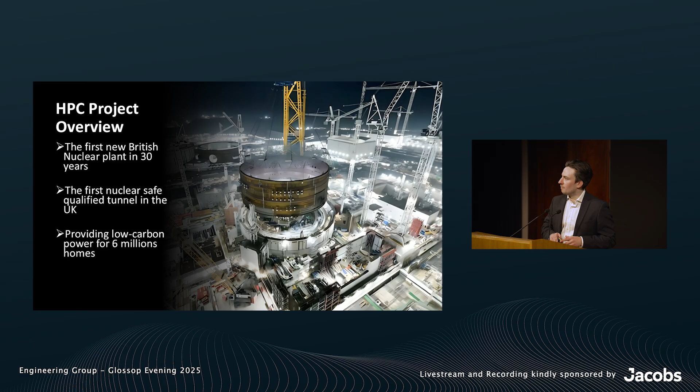The importance of the nuclear industry is growing, with 25% of projected electrical demands in 2050 fulfilled by nuclear. So the importance of geological insight for nuclear-rated structures, amongst many things, I've focused on planning and construction. When planning and locating nuclear sites, we must consider seismic resilience to near and distal ground movements, the effect of liquefaction, climate change adaptation with changing sea levels and coastal erosion processes, and ongoing geological processes such as slope stability issues on land and in marine environments, as well as dissolution in some places.

During construction, we have to look at unexpected ground conditions and mitigating those, working in a corrosive environment at the coast, and the normal tunnelling and underground structural hazards as well.

During my involvement at Hinkley Point C, I was involved in the marine works. The purpose of the marine works was to transport seawater from the Bristol Channel through to the nuclear power station, where it was circulated around the reactors to cool them down. The water is then treated and put back out to the Bristol Channel.

This is done by 3 tunnels: 2 intake tunnels, 3.5 kilometres long and 7 metres in diameter, and the outfall tunnel, 1.8 kilometres long and 7 metres in diameter. At the distal end of these tunnels, we had 6 shafts which connected to the seabed. The tunnels themselves were sunk by TBM, the shafts sunk from offshore vessels, and then we have where I was involved, which is the tunnel shaft connections.

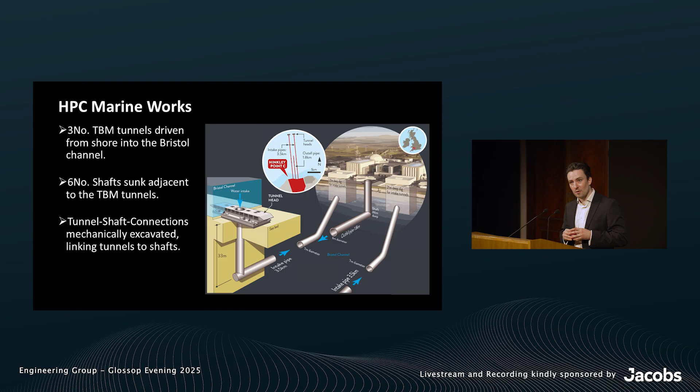Something I think is quite interesting about these tunnels is when they are in full bore and operational, they'll be able to transport 120,000 litres of water per second. And something I quite enjoyed was the fact that they were predominantly gravity driven, a nod to efficiency there, in order to reduce the amount of pumping and therefore the cost of producing a unit of electricity at the power plant.

I'm going to take a closer look at where I was involved, which was the tunnel shaft connection. On the left-hand side of this diagram, you'll see the shaft, which connects to the seabed, about 33 meters above us. On the right-hand side, you'll see the TBM tunnel, which connects back to the power station. These two structures are offline from each other to isolate the stresses they put into the rock during excavation, but this requires a connection between the two.

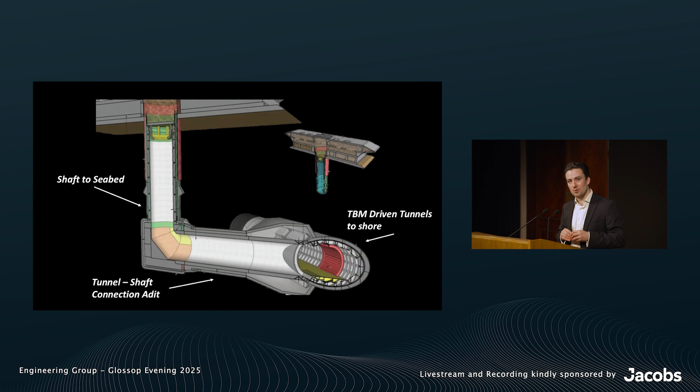In my case, I was involved in the temporary works, where we were opening up an underground space driven from the TBM tunnel over to the shaft. This opened up a space to allow the permanent solution, a reinforced concrete structure, to be assembled within that.

Fast forward to the Triassic, and we have a period of extension, with openings of half grabens and deposition of sediments - in this case the Mercia Mudstone, the Arden Sandstone, Blue Anchor Formation, and the Penarth Group. Continuing into the Jurassic period, we have continued rifting and deposition of the Blue Lias Group, which is what we ended up tunnelling at Hinkley Point C, then the Oxford Clay and Kimmeridge Clay above that.

During the Cretaceous, we have a reversal of the tectonic setting, going back into compression, so we have reactivation of the existing structures in compression. Following that, we have deposition of the Quaternary deposits - what they've done for us, I'm not sure yet.

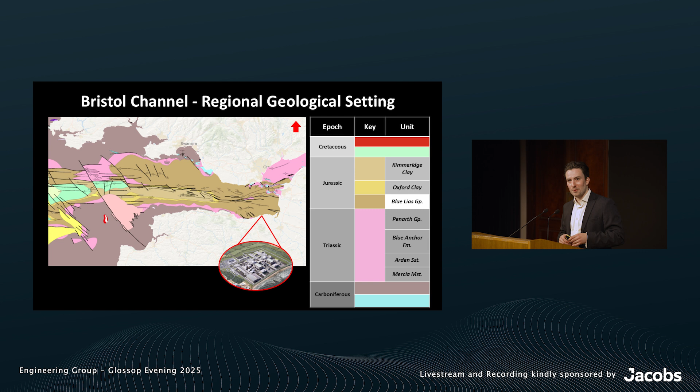Moving forward, I'll look a little closer at the Jurassic sediments, the Blue Lias Formation. On the left-hand side here is a view that will be familiar to some people - it's at Limpert Bay in Wales. On the right, a less popular view, under the Bristol Channel. The Blue Lias Formation is...

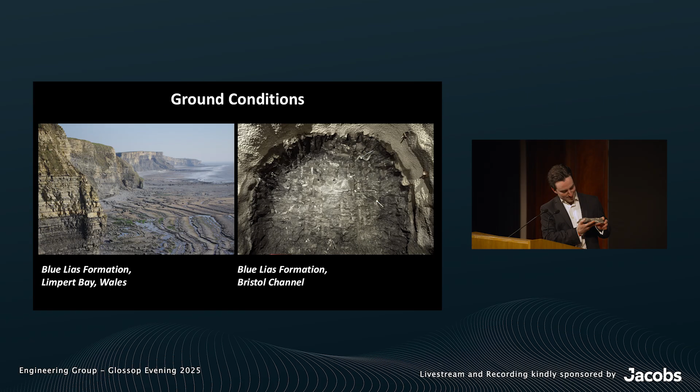...mudstone and limestone interbeds. The limestone beds are 30 to 300 mil thick in what we've seen, argillaceous and blue-grey in colour. The mudstones are much more thinly laminated, like this one I rescued - much more thinly laminated, dark, and in places fossil-rich. This one I took because it's full of ammonites, and much more fissile as well.

I'm going to talk a bit about some of the key hazards we came across while tunnelling in this formation. We have variable ground conditions, resulting in variations in strength over short distances, but also different rockfall or rock failure mechanisms. The limestones are much blockier and therefore more liable to kinematic failure types - this was mitigated by additional bolting in places. We then had the mudstones, which were much more prone to raveling failures and soft ground squeeze. This was mitigated by shotcrete and ongoing monitoring.

We then have groundwater and ground gas. Associated with the Blue Lias Formation, we have interbeds of organic rich material, which can produce H2S and methane. Combined with the Bristol Channel above us, this results in the potential for groundwater and ground gas inundation to the adits. We also have the potential, given the tectonic activity in this area, for quite a lot of fault zones, which result in unstable ground masses. Groundwater, ground gas, and fault zones were mitigated through the use of ground investigation and forward probing.

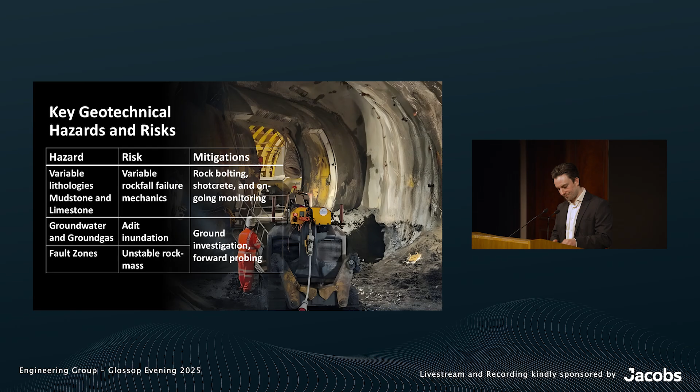I'm going to talk a bit more about my role now in the project and the key points of what a geologist would do within the remit. My primary function was to link observations of ground conditions from the tunnel back to the design team and into the daily review meetings.

Also supervising excavation of material and witnessing adit support installations, and then comparing the ground conditions against the design assumptions that were made - this was mainly in rock mass characterization.

To begin our process, we would start from the TBM tunnel, as you can see in the biggest picture on the right-hand side, and we would look to do forward probing from this tunnel. This represented the most local, finest scale of ground investigation. So the model started off with much more regional ground investigation, coming down through the TBM, and then into this stage where we're really probing the ground in which we're going to be excavating.

So you can see on the blue diagram, the bottom left one, the kind of porcupining probes. This gives us forewarning of any oncoming hazards that we might be expecting, looking back at ground gas, groundwater, and unexpected ground conditions.

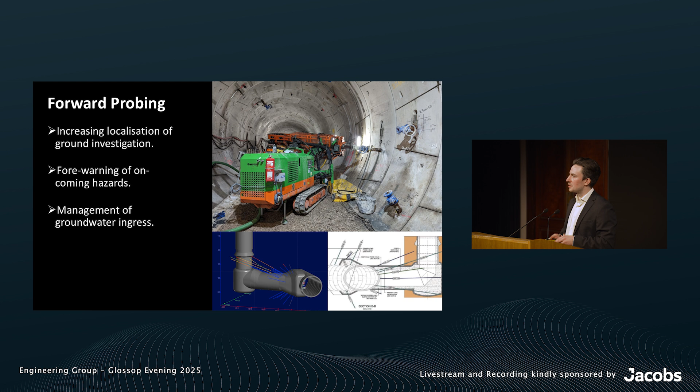So once we were a bit more familiar with what we were going through, we could do full excavation. In this phase of works, we had 6 adits altogether, and each one had 50 advances of excavation, removing around 800 metres cubed of rock per adit.

When we were doing an excavation, geologists would be on site looking at characterising the rock mass and giving it an RMR value. To produce the RMR value, we would estimate UCS by Schmidt hammers, look at RQD, and then the condition, spacing, and orientation of discontinuities.

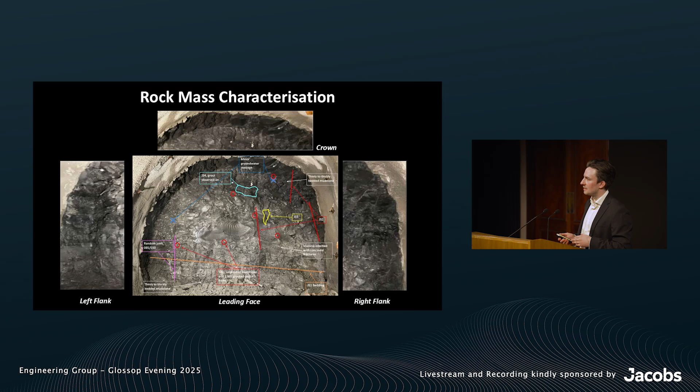So once we'd given our RMR and fed that back to the daily review meeting, there might be changes or enhancements to the support measures.

We would then look at selecting support, as we had different anchors available to us, and then management of groundwater and ground gas. Where there was an intersection of these things, we could compare it back to the ground model to understand its potential source and if we could expect more or less of it coming through, and look at how we could potentially mitigate these things.

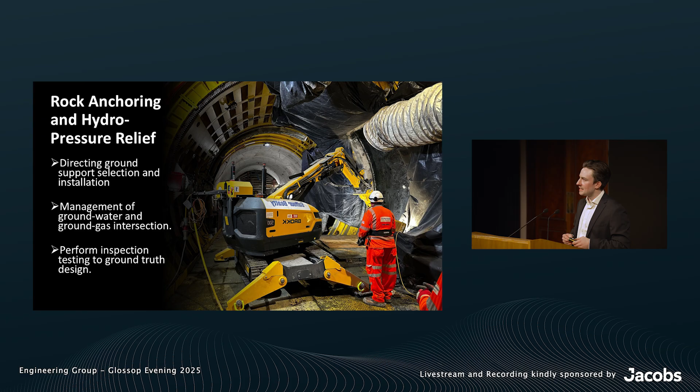We'd also perform inspection testing of our ground anchors to ground truth the design and ensure it was operational to the desired standards. So, in conclusion, I've given an overview of the importance of geological insight to nuclear development.

And the importance of understanding a full ground model of your site before we begin with this kind of engineering. I think the 4 key areas in which ground engineering and geological context is important are safety, economy, project agility, and resilience. Safety during construction, in which we have to keep our workforce safe, but also in operation.

These tunnels are vital to cooling the nuclear reactors and therefore imperative to the design of the structures. We have economy - as I was working in temporary works, we could optimize our use of shotcrete and anchors to the ground conditions, which then had a time and budget enhancement.

We then have project agility, so being able to understand which kinds of hazards may be present, we could adapt toolbox measures to combat this and avoid redesigns and being surprised by these things. And then in resilience, finally we produced structures suitable for the ground conditions in which they exist, and hopefully will operate for the entire lifetime of the project going forward.

So thank you very much for listening. I hope you all have a great evening.

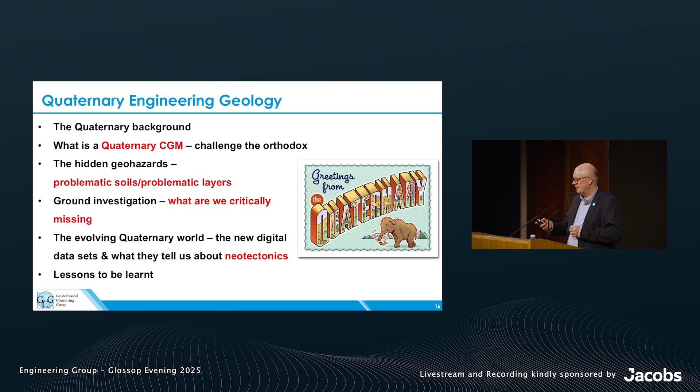So I've changed the title now from what has the Quaternary ever done for us to what has the Quaternary done to us. And hopefully we can go through and see some of the case studies where we've had these problematic ground conditions. I had a lovely conversation with Rodney Bridle about the days of dam engineering, and the dam engineers had this term called treacherous ground, and I felt that was actually more appropriate.

You may just guess that I did this slide on Halloween, so hence the menace that is the Quaternary, something that we need to approach our ground investigations, approach our conceptual models, really understanding that these ground conditions are highly variable and can kick an engineering project, a construction project, in the teeth if you don't understand that variability.

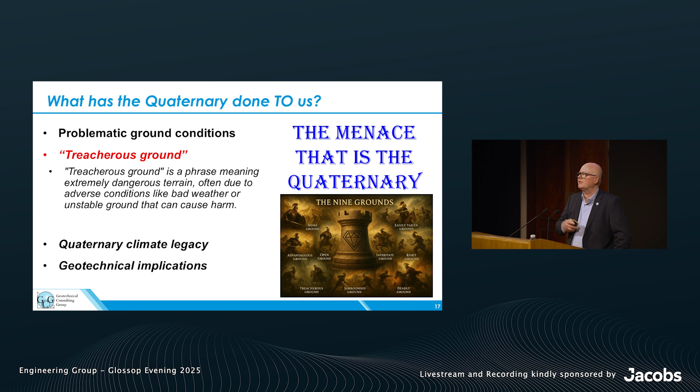So we're going to have a little look at the Quaternary climatic legacy and particularly understand those geotechnical, those ground engineering implications that those climatic changes, those significant climatic changes, have actually presented.

This is why we get a bit sneered at by the hardcore geologists. So we've got 4.6 billion years of Earth history. The Quaternary is the last 2.6 million years. But really, in terms of our engineering significance, it's the last 24,000 years that have really churned up that ground, given us deposits, given us geological hazards. So in terms of that whole spectrum of the stratigraphy, we're the unwanted uncle at the party in terms of the geological column, right at the very top.

But what we all do in our day-to-day jobs, it really is that most significant part of that geological column. Which is ironic, because if you think back to your university courses, your masters, your undergraduate courses, it's perhaps the element of that stratigraphic column least focused upon. Yet when we actually go out and start to work, we see that it's probably the most important thing we need to understand if we're going to de-risk projects and have successful engineering constructions.

I was told by the master's students at Portsmouth that I was the riddler. So there's your first riddle: where's the Quaternary legacy? If you look at the stratigraphic distribution of rocks across the British Isles, where are those Quaternary deposits, those Quaternary land systems? Of course it's a trick question, because every single part of the country, top to bottom, John O'Groats to Land's End, has had a Quaternary influence.

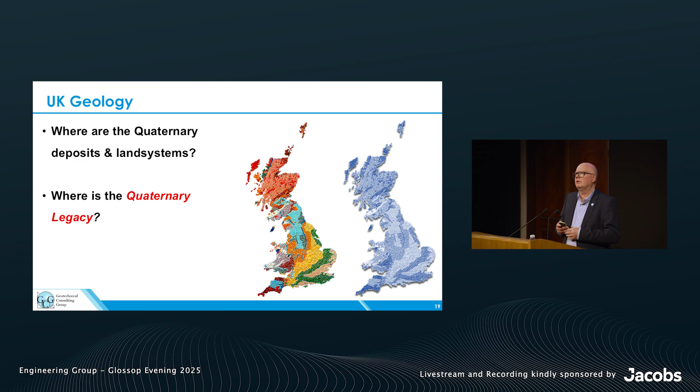The climatic changes have left a legacy within that ground profile. So wherever we're engineering, whether it's in Shetland or Penzance, we're going to have some legacy of those major climatic changes that have influenced those ground conditions, that have given us that treacherous ground, those problematic horizons. We can't escape the Quaternary as a geological interval, as a series of legacies left behind.

So really what I want to set out to achieve tonight is to change your ground model mindset. We've spent a lot of time over the last 20 years getting conceptual ground models to be the bread and butter of engineering geology, understanding that if we can appreciate what is in a particular geological environment, we can go and investigate it, we can de-risk it.

But we've got to slightly change our mindset when we're looking at the Quaternary, because we've got different aspects that have influenced those particular ground conditions. We've got geotechnical implications as well as geological implications. So we really need to understand some of those scientific fundamentals, because there's a legacy we need to appreciate when developing those ground models.

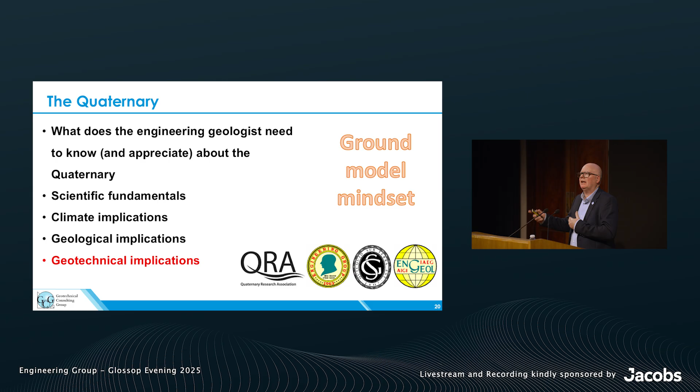I'll show you what I mean, how we can move from conventional ground models and give you some takeaways that you can use to appreciate that variability and that legacy within those particular horizons. So the other thing we need to start dispelling is some of the orthodoxies.

This is perhaps the layperson's idea of the Ice Age. We've tended to talk about the Quaternary as, in singular, the Ice Age. And there's this static picture here, nice diagrams of northern hemisphere, southern hemisphere ice sheets developing, valley glaciers developing, permafrost tundra in front of those ice advances. We seem to think of this as a static picture, nothing really to see.

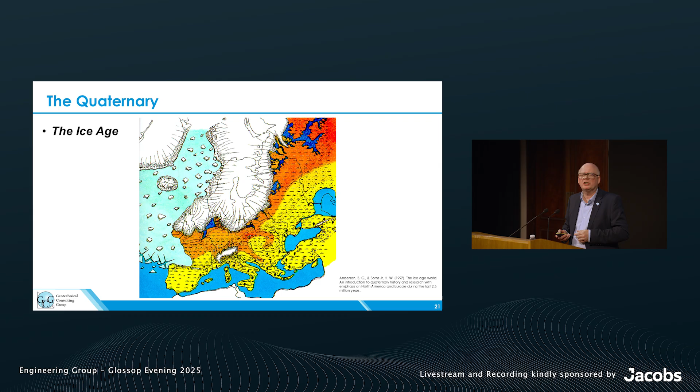But when we actually start to delve into those climatic changes, we've got a whole variety of different conditions we need to appreciate. We have glacial conditions, when it gets cold and we see ice sheets advance. We then have non-glacial conditions when those ice sheets retreat. Within those cold conditions, we have stadials when it gets a lot colder, and interstadials when it gets a lot warmer.

So we're starting to see fluctuations in climate, fluctuations in temperature, which means that static picture is completely wrong. We're seeing advances and retreats, advances and retreats. As we advance, we get isostatic depression, sea level rise, sea level fall, then retreats, then recovery. We've got this complete cycle of cold, warm, and very warm, all influencing the ground profile, all having a legacy in those geotechnical conditions.

And what's the enemy of geotechnics? The enemy of geotechnics is water. And this is a system that's got an awful lot of water. What happens when water freezes? It expands.

We get all sorts of modification of that ground profile. So we've got these temperature variations that we then need to understand in terms of that legacy, in terms of that particular ground profile.

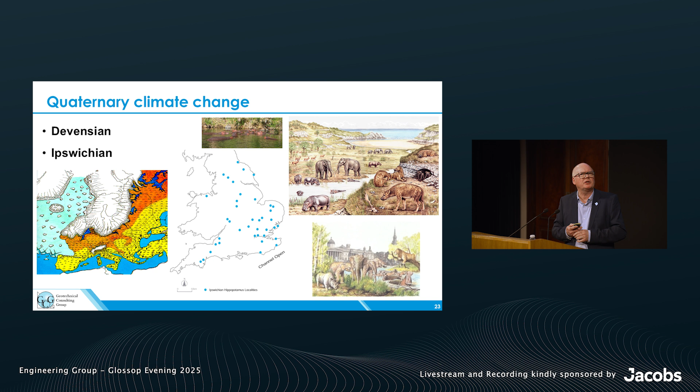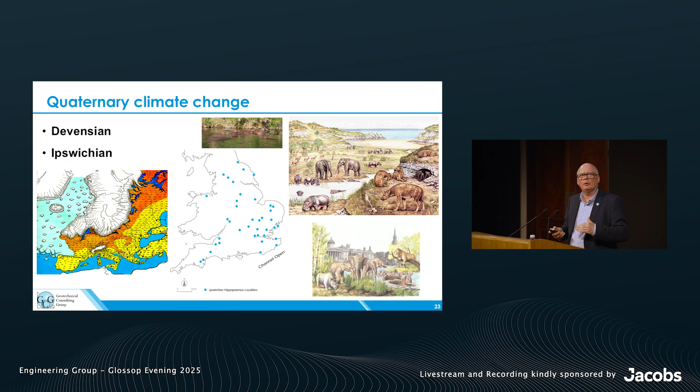We don't think of the Quaternary as having warm conditions, but there's some research that suggests that on the Scilly Isles, there were subtropical conditions. So we think of that in terms of a weathering profile, in terms of that ground modification from one extreme to the other. We've got some significant influences to appreciate, again getting to that mindset about that top surface legacy.

I think this was the most fantastic exam question you could set, and we've never sort of pushed its importance, but this is the geotechnical implications of Earth's interstellar position. So what's driving this is these Milankovitch cycles.

That's a Serbian mathematician called Milankovitch on the bottom left there, and that was James Croll, who was the janitor in Edinburgh University, who also added into these models to understand where Earth's position was in relation to orbiting the sun. We have an eccentricity, we have an obliquity, we have a precession. So we're at different positions in terms of that orbit that's giving us these climatic changes.

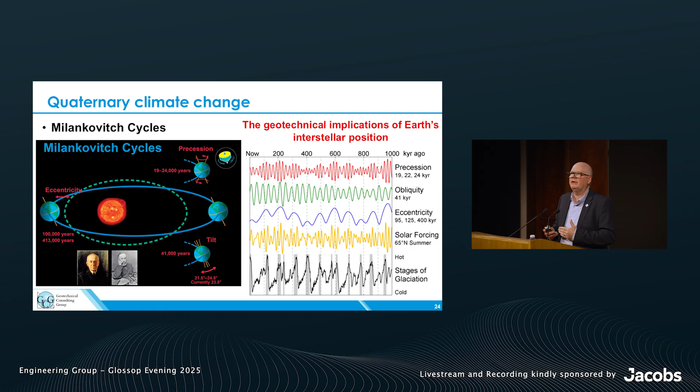When we start to actually plot those climatic changes, we can start to see we've got these great swings across a very, very short period of geological time that, again, are constantly modifying that particular ground profile.

Even if we go into more historical times, we can again see some of those fluctuations. We had what was termed the medieval warm period. Between 950 AD to about 1250, we had significantly warmer temperatures in the country. We were a wine exporter to France during that period.

So again, what does that mean in terms of the ground profile? We're starting to see desiccation. We're starting to see moisture conditions change.

And then that was followed by a very, very wet and very, very cold period where we had the Little Ice Age. We got the frost fairs on the Thames. Many of our landslides we can actually date to being triggered in that particular period.

So we've got these macro climatic changes and smaller cyclic changes again, all having an influence, all actually affecting that particular ground profile. So we need to start thinking about moving away from this orthodox picture. This is perhaps why some of the diagrams we see are perhaps not really helpful in terms of understanding that legacy. This is the static picture.

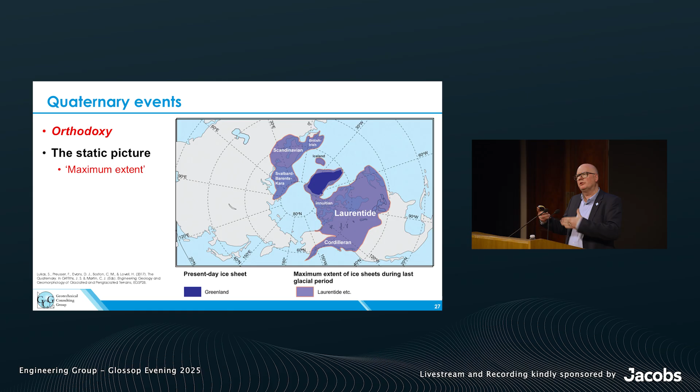This is effectively the maximum extent of those northern hemisphere ice sheets. We've got lines on a map - solid lines, not dashed lines that we've been putting on a map. What we need to start to think about is are these lines really helpful? Have we got these finite lines? Is this really helpful in the development of understanding usable conceptual models?

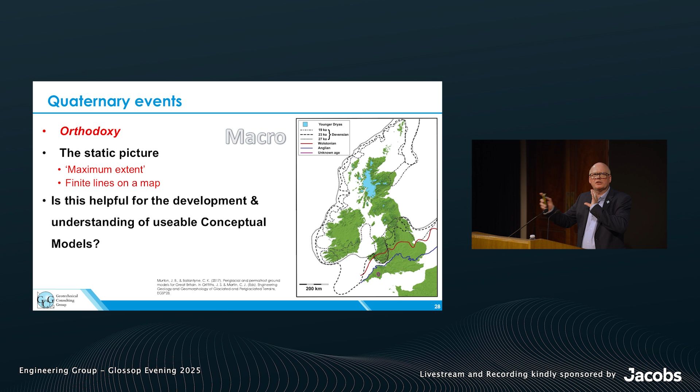We tend to look at lithological boundaries and think that particular strata finishes there, that particular strata starts there. The diagrams that you can see there are just simply indications of a potential maximum extent. They are not definitive in terms of where the modification of that ground profile has actually taken place. But they're a good starting point to start to understand about the climatic influences that we see across the country.

And it's a very, very useful map in the middle there where we can start to understand where we've had glacial conditions, where we've had periglacial permafrost conditions, and where we've had a mixture of both. We can start to build up that understanding of those climatic influences and start to appreciate that we haven't got, if you like, solid lines, fixed lines. We've got fuzzy zones that we need to start to appreciate.

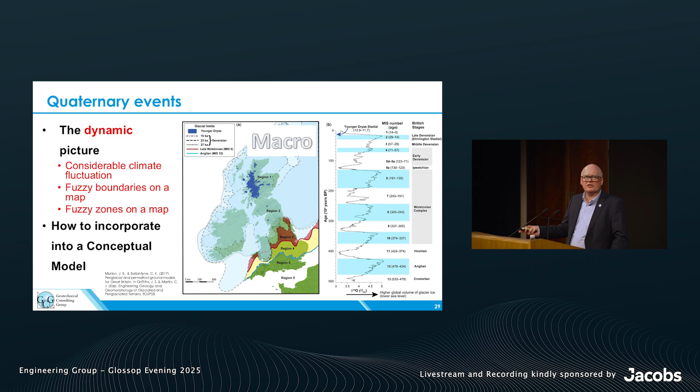We've got this much more dynamic picture of ice advancing, ice retreating, ice advancing, and ice retreating. So the question is, how do we incorporate that variability into a conceptual ground model to fully predict the kinds of ground conditions that we could come across in an investigation or within a construction project?

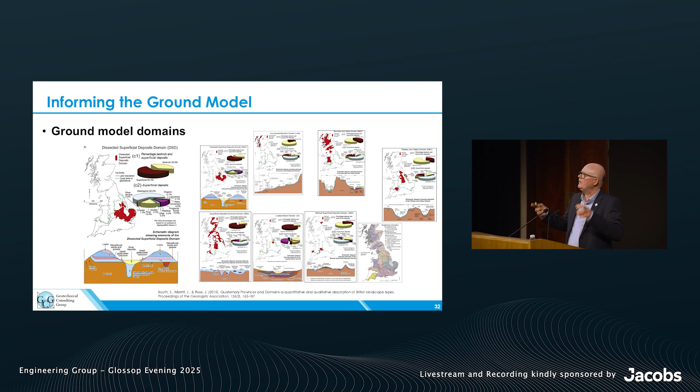One very useful key go-to paper is by Booth, Merritt, and Jim Rose, when we started to look at the concept of provinces, domains, and land systems. This looks at the glacial and periglacial influences, upland or lowland, across the country, and is an extremely good starting point for developing that conceptual model of ground conditions, landforms, and deposits. What is the expectation in that particular environment given those climatic variations?

But I want to give another kind of twist on that. I once went to a very interesting public lecture given by Professor Sir Roger Penrose, who worked with Stephen Hawking at Cambridge and Dennis Sciama. He gave a presentation on the origin of the universe using 3 overhead transparencies, the first simply saying, I was Sir Roger Penrose. So, hopefully not in the same caliber, I'm going to give you 3 slides to get you into that mindset.

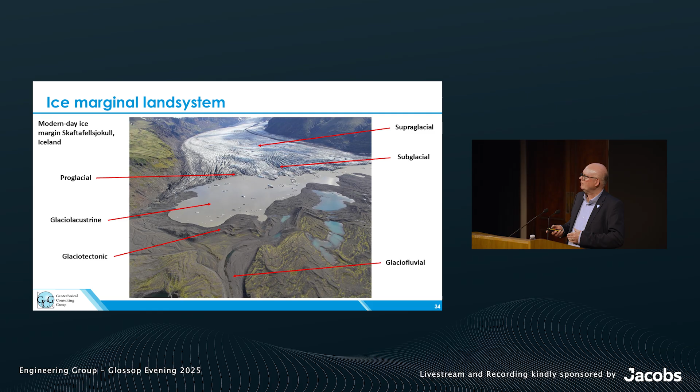These ice marginal systems become really quite significant. When we first started engaging with the engineering group and the QRA, the Quaternary Research Association, working on Engineering Geology Special Publication number 28, we were a bit dismissive about the marine isotope curves, seeing them as just a research element showing climate had changed with the Milankovitch cycles. What has that got to do with geotechnics?

But the more we focused on these curves, the more we realized this is what was influencing that ground profile. We needed to understand how the climate changed, the frequency of that change, and the legacy it provided. We had some very old glaciations, the first to incorporate bedrock into glaciogenic materials, but subsequent ice advances completely reworked and remolded that material, giving a different geotechnical characterization of ground conditions. Understanding we didn't have a static picture but a dynamic one, with variability, reworking, and constant lateral and vertical change, became very important in developing that mindset.

I hope this works. This was brilliant work done starting with the University of Aberystwyth, Sheffield University, and Durham University, part of what was called the BritIce project, looking at that variability and starting to reconstruct ice margins.

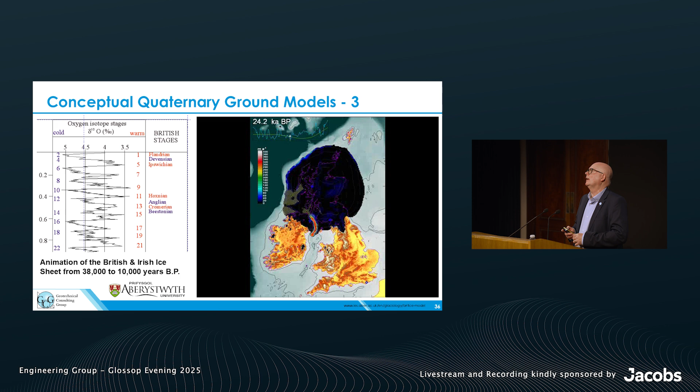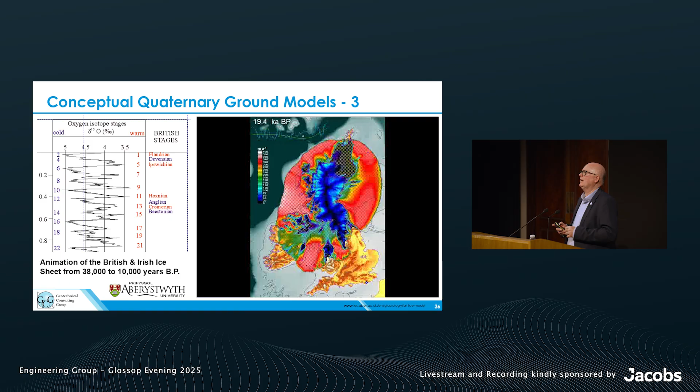The scale there is meters per year. And you start to see now, effectively, what is happening to your ground profile in this extremely short period of geological time - this constant reworking, this constant remolding, this constant incorporation of new material into old material, giving your geotechnical layer, your foundation layer, your investigation layer. We've not got this static picture, we've got a highly dynamic picture.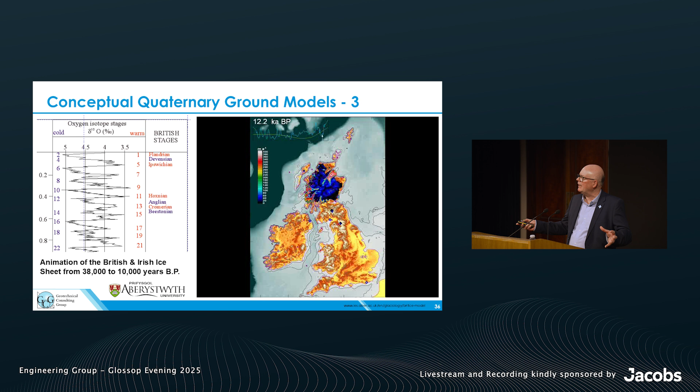Highly dynamic reworking of that particular terrain, and sometimes it's difficult to break away from, because we like static things. We're used to understanding the London clay formation as a nice static horizon, give or take. We understand the chalk, give or take. The Mercia mudstone, give or take, is relatively static. Here we've got massive inherent variability because of these dynamic processes in this very, very recent part of geological time.

So if we're going to inform the ground model, this quaternary history becomes really quite important - some of these fundamentals of quaternary science, understanding the climatic variations, what does that mean in terms of the glacial and periglacial genesis of the materials we're looking at? Have we got these primary tills where bedrock has for the first time been incorporated into an ice advance, or have we got reworking? The nature of that ice advancing over the substrate.

Have we got passive or active transport? Have we got material that's being ground down into a fine-grained mass? Have we got larger clasts that have been carried along on top of the ice, for example? Have we got direct bedrock inclusion? Have we got reworking or remolding actually taking place? So that whole ice process gives us our engineering and geohazard significance.

Those mechanical processes become significant in the understanding, in the mindset development when working in these terrains. We've perhaps not got deep basin sedimentation or a desert environment which is spatially very, very extensive and very continuous. Here we've got this continual variability, this continual lateral and vertical variation. And that's the legacy, really.

We're not going to read them all out, but this starts to become the geotechnical legacy. We've got anisotropy, we've got different environments, we've got water, we've got land, we've got shunting in terms of tectonism, we've got constant reworking, we've got constant lateral and vertical variability, and each of these then has a geotechnical implication that we need to appreciate.

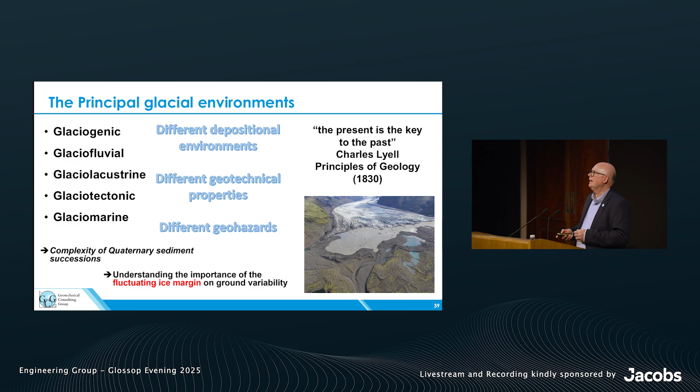So we're getting geotechnical materials. We've got security on standby for certain of you - if anyone says the word in the middle, which some of you know from many years is not allowed.

But we need to again move away from thinking of glacial tills as one material. All of these, you might say, could be described as a glaciogenic material, as a glacial till. But some are deposited subglacially, some are carried on top of the ice and deposited supraglacially, some are shunted along, some are tectonized. So that one word till, perhaps we need to subdivide further, because as you can imagine, looking at the images there, each has a different geotechnical response.

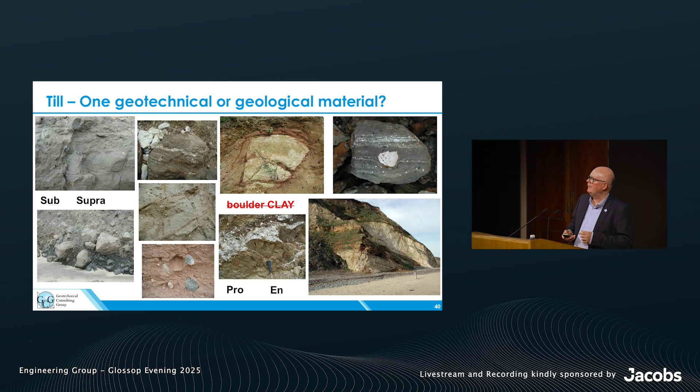In this system, the ice marginal system becomes really important. This is perhaps the most dynamic of those particular environments. We have lateral and vertical variability, material variability, and geotechnical variability. When you look at that slide, where would you plan an investigation? I think I've got another example there.

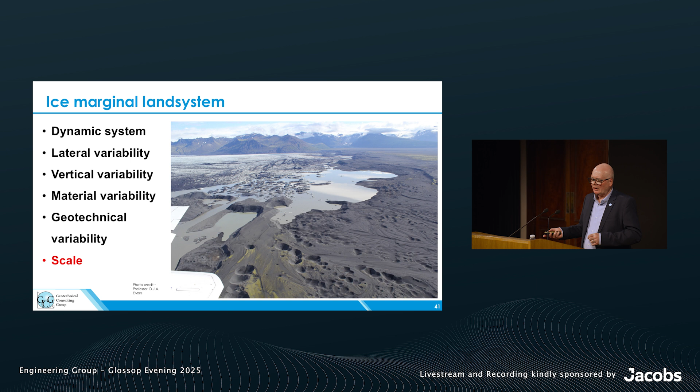We've now moved offshore, and that's the environment we're investigating for our wind farms. We seem to have forgotten that sea level recovery is only very, very recent in quaternary terms. But at the moment, we've got many investigations - seismic surveys, offshore CPT surveys - taking place in that environment. For example, we've got east-west rail effectively traversing across an ice front going from Oxford to Cambridge, and many monopiles. If you think about how you'd plan that investigation without getting into the mindset of a quaternary conceptual model, you could come really quite unstuck. Across that whole scenario we have differing geotechnical parameters, differing ground conditions on a very small scale - sometimes on a 10, 20 meter scale we're seeing that kind of variability.

So our mindset when interpreting the data needs to move away from where we are in conventional, if you like, solid or bedrock geology.

I was going to protect the innocent on a few of these, but I'll give you a few examples of what happens when you don't fully understand that variability in these environments.

This was a brand new school built in Hertfordshire, and very quickly they had groundwater flooding issues, because they built the school effectively on a buried glacial fluvial system. The ground investigation hadn't fully understood the legacy - the present is the key to the past - with a whole series of stacked and buried channels. The construction had taken place, the ground model hadn't been fully appreciated, and effectively there was complete hydrogeological continuity through these relic glacial fluvial channels.

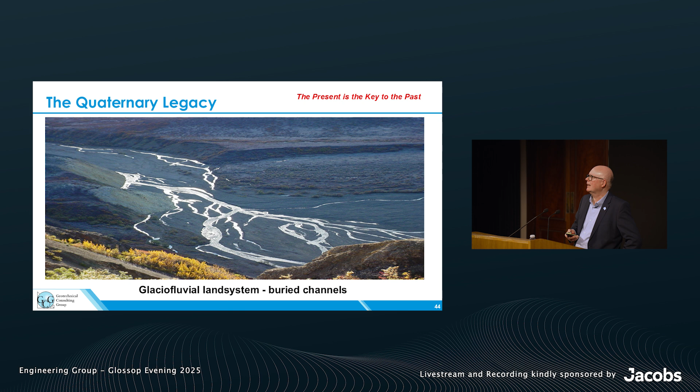Another example - this is Bishop's Stortford Station Yard. New construction taking place, starting to put in piles. This is the River Stort, a major drainage channel coming off the Anglian ice front. You can imagine what happens when an ice sheet wanes - the energy in the system, the downcutting, the sediment emanating from that system rapidly fills up a very deep valley. The land system present was a series of channels, abandoned channels, and abandoned ponds. So every time we did a CPT across that car park we got a completely different trace. Every time a borehole was put in place there was no lateral continuity, because you had this braided system, isolated ponds, small lakes, each with different sediments, each giving different ground responses in terms of the geotechnical profile.

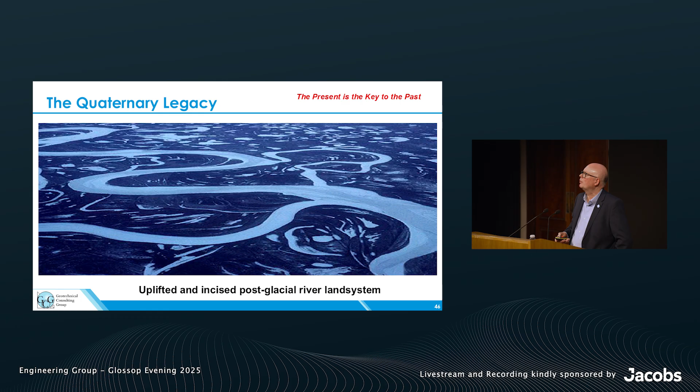Another example - this was a new retaining wall cut into the supposed London clay in North London, which started to get significant deflection. The environment was effectively the relic periglacial environment - flows and active layer detachment slides, giving a whole variety of remolded, sheared material. The construction was effectively on that paleo legacy environment without fully understanding it.

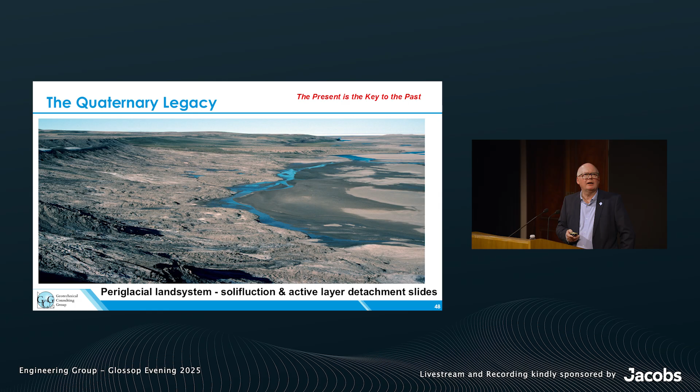And this is where testing the orthodoxy comes in. This was the area of the classic Skempton brown clay, the weathered profile within the London clay.

How do you test whether it's a weathered profile with reduced strength, or it's completely remolded as part of the solifluction flow and active layer detachment slide processes? This is where the smallest evidence, when logging and describing these materials, becomes very important. In the middle of that brown clay, there's a nice rounded clast present.

That is a clast from the Dollis Hill gravel, the terrace gravels that sit on top of the London clay in the London basin. So what you're looking at is completely reworked material that's incorporated a single clast that's managed to entrain itself within that material. That's important geotechnically because that is now fully remolded, with a residual strength, as opposed to part of the brown clay, the classic brown grey clay in the London clay formation, which is part of the weathering.

So extremely small pieces of information can sometimes help unlock that ground model. Those of you who are more geotechnical engineering focused know the significance of changing that value in terms of your design calculations.

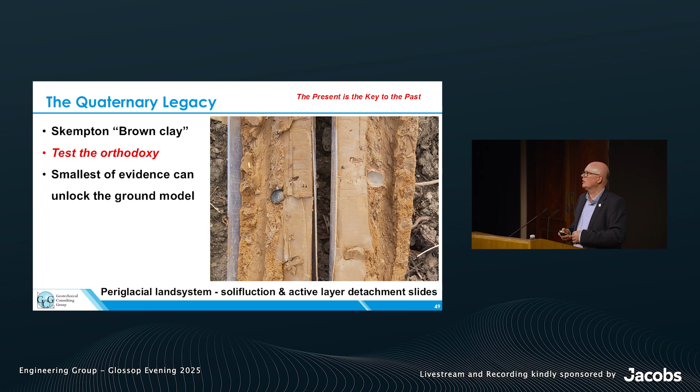And I couldn't do a presentation without talking about these particular features. This is perhaps the worst kept secret in all of engineering geology. This was the new American embassy in Nine Elms in Battersea, constructed on top of a former periglacial environment where there was a significant drift-filled hollow. There's still a very lively discussion about whether we're looking at relic pingos, these ice blisters that have left a significant foundation legacy.

And if you're working in London, this should be a key aspect of your conceptual models: the nature, the distribution, and the impact of some of these drift-filled hollows.

A few years ago we had Eddie Bromhead's Glossop lecture where he talked about slide-prone horizons. He focused on landslides and looking at what were key and critical problematic layers within a landslide system that perhaps had been overlooked in the past, that can then control that kind of slope instability, focusing very much on volcanic ash layers, sources of smectites, giving us very thin yet highly significant layers in terms of controlling ground instability.

And the same goes for the quaternary environment. We need to understand where is the treacherous ground, where are our problematic layers that give rise to slope failures, embankment failures, and how do we find them in a ground investigation? Do we look for them in a conventional ground investigation, or do we need to change our mindset in how we undertake those intrusive GIs?

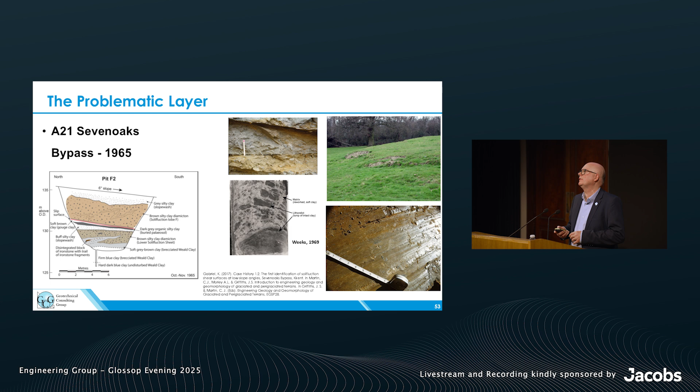And again, we can look at the Carsington Dam failure in 1984, where the classic yellow clay horizon was actually present. This is extremely significant in some of the new reservoirs being constructed or investigated across the country at the moment, putting very large embankments on top of the periglacial legacy in terms of the ground profile.

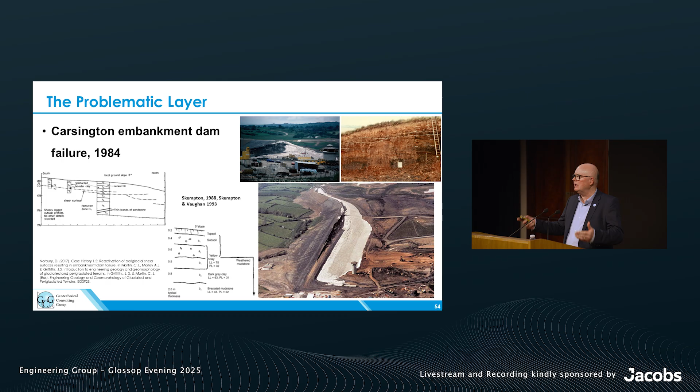What do we need to understand about the significance of those problematic layers, of that treacherous ground? How can we then go and investigate? How can we ascertain that we've de-risked the site, that they're actually not present, or find them and deal with them if they are present within that ground profile?

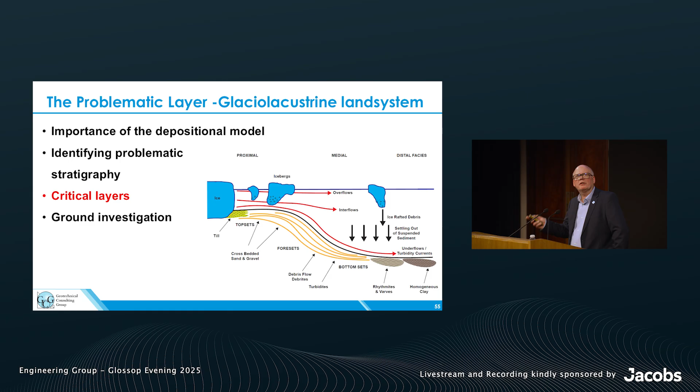So I'm going to have a look now at some case studies where we can start to think about these critical layers, these failure-prone horizons, how we can start to investigate for them, how we can start to understand their presence. We can go back to some fundamentals of understanding the depositional model, how we bring back stratigraphy, high resolution stratigraphy, when developing our conceptual models and de-risking particular projects, and think about differing ground investigation techniques we can use to find these subtle layers present within our ground profile.

So we've got a couple of case studies showing the glaciolacustrine environment, the glacial lake environment. This is an example in a place called Voiron. Those of you who follow the Tour de France, some of these will be very familiar.

There was a project where, in the center picture, there is the TGV crossing. They actually had a level crossing on the TGV, and a gentleman in his French lorry got caught on that crossing. There was a rather large incident, and it was decided to put in an underpass to create a much safer crossing. So an excavation started, the engineers came along, and as many engineers love to do, banged a load of sheet piles into the ground.

You might see in the center there that the first clue is the laminated nature of the deposit. This is the legacy of that glacial lake, that glaciolacustrine environment. What happens when you start to bash it with a sheet pile is you start to liquefy it. So on the right-hand side there, you can start to see a lot of moisture being released within that ground profile.

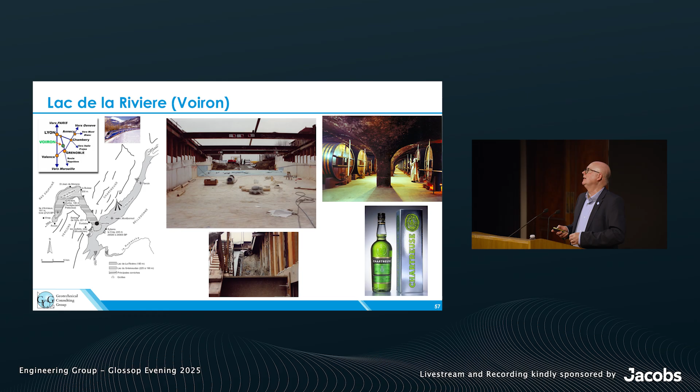Not only was it the important TGV line starting to see closure within that cutting, the building on the right there, which some of you may remember fondly, is one of France's national monuments, the Chartreuse distillery. It's been around since the 1760s, and the cutting started to close in because the glacial lake deposits released their interstitial water, as they were not understood and not treated sensitively. Luckily, they managed to save it - there was the 250th anniversary in 2014, and the Chartreuse distillery was saved.

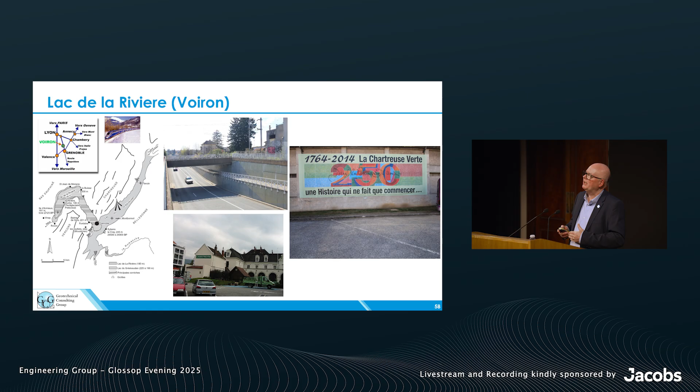But you can start to see that if you don't understand the nature of those materials, very quickly you can realize a risk, realize that geotechnical hazard in terms of the disturbance to those particular materials. Now, another example is the A51 construction.

The A51 was a very important route. Those of you who are aware know that the French go on holiday on the 1st of August in Paris - the entire city goes on vacation. There's a website that tracks the world's longest traffic jams, so someone somewhere has got to do it. On the 1st of August, there was a 110-kilometer traffic jam of Parisians trying to get down to Provence.

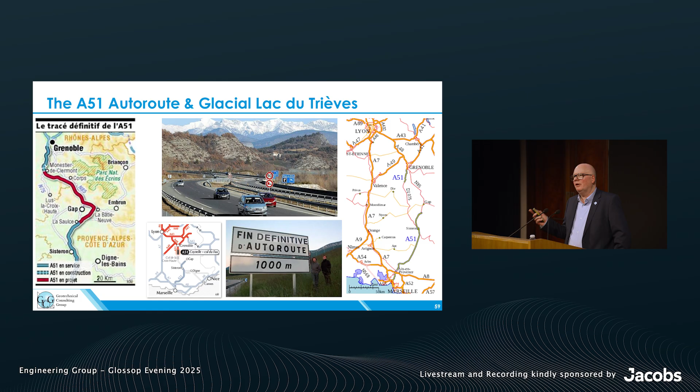This became a very important route in de-stressing that Rhone corridor, going from Grenoble down to Sisteron in the south. The difficulty was the road was crossing through this ice marginal landscape, through an area of significant glacial lakes. Part of the road was then constructed - you could pay €1 to go on the section you see there. Half a mile later, you came to a small roundabout on what was effectively a B road. So for 35 years, there was nothing connecting the two systems.

It was going through this highly challenging quaternary area, a glacial and ice marginal environment with major glacial land systems. It also had challenging geological conditions because it was a seismically active area, giving rise to a whole variety of problematic soils. So this was the paleogeography that helped to unpick and understand, and focus again on those failure-prone horizons.

You can see there effectively a reconstruction of the major valley glacier systems - the Isère, the Romanche - many of the existing ski resorts, the high elevation ski resorts. On the left-hand side, you can start to see the sedimentary legacy, the sedimentary deposits left behind within this glacial lake system.

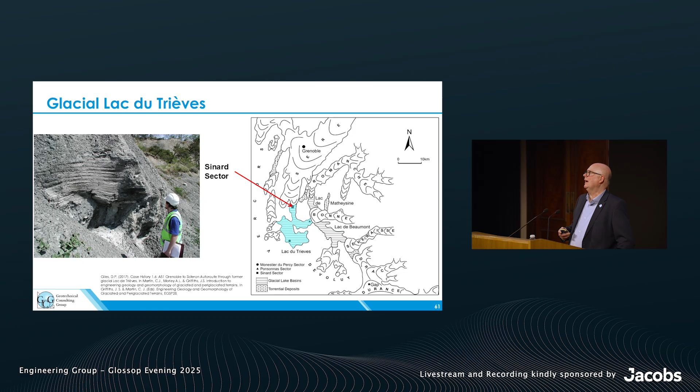But as we'll have a look in a moment, all is not what it seems. We can see what looks like a relatively competent set of deposits, but they have significant geotechnical issues. So back to our original baseline geology, understanding the depositional environment - there's effectively the conceptual model of the depositional environment for a valley glacier with an ice marginal lake, starting to see the variety of deposits found in that particular lake setting.

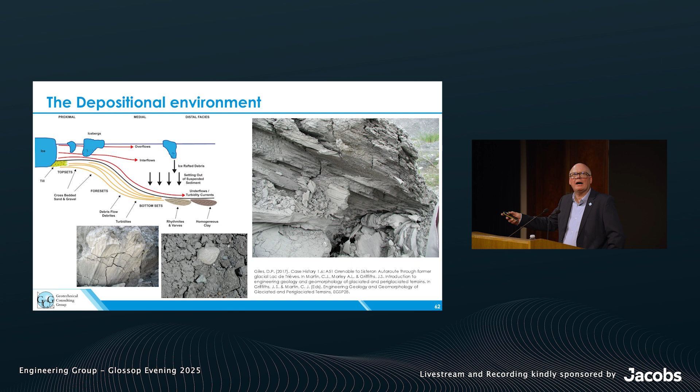We can see ice rafted debris. We can see the classic rhythmites, or old school geography, varves - couplets of silts and clay. In the deeper part of the lake, some quite remarkable photographs - they're actually turbidites, scour toe features with turbidites running down into the depths of that glacial lake. So we've got a lot of sedimentary variability there, but there lies the geotechnical hazard.

Within these clay and silt couplets, there's a significant amount of interstitial water held and trapped within them. But as we saw back at the Chartreuse cutting, if you disturb that, you can release that interstitial water and start to see a liquefying process take place. To give you an example of how problematic that can be, this is the Sinard sector - the area that the road was going to be constructed through.

And you start to see how major landslide systems then start to develop. On the right-hand side, you can see it starts effectively as a rotational failure that then becomes a translational failure. And then as this water is then released, we see significant mud flows, and these have actually caused a large number of fatalities in this particular part of France.

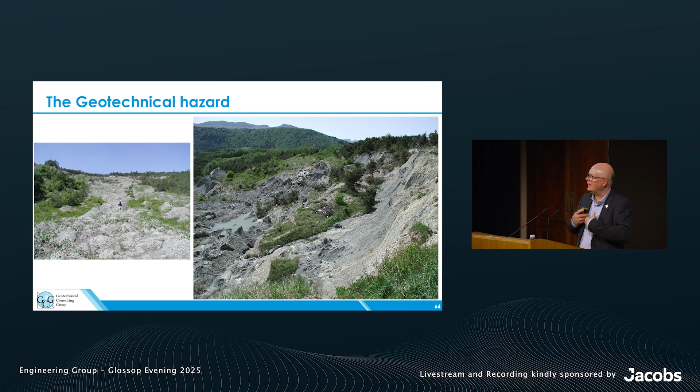They are high velocity, extremely problematic, and in terms of being caught in one, extremely dangerous. But we see this change from what looks like quite competent strata into effectively completely liquefied material, and significant mud flows then start to generate. But all is not what it seems.

We're sort of thinking that we've got these great thicknesses of these glacial lake deposits, but when we start to actually focus in, we can see that we've effectively got these laminates holding the water, and in between them we've got much more over-consolidated, clast-rich material. And this is representing these advances and retreats of the ice front.

When we start to actually log the outcrop, we can see that the controlling horizons are these very, very thin bands of these glaciolacustrine deposits. The mass as a whole is not really the answer. It's these very, very centimetre scale bands that are actually controlling that stability, that are releasing that water, that are then creating these large scale rotational and translational landslides.

So the subtleties there, back to Eddie Bromhead's slide-prone horizons, the significance of these individual layers becomes again important in our ground investigation. So the project - just to give you a sense of how the project was then completed -

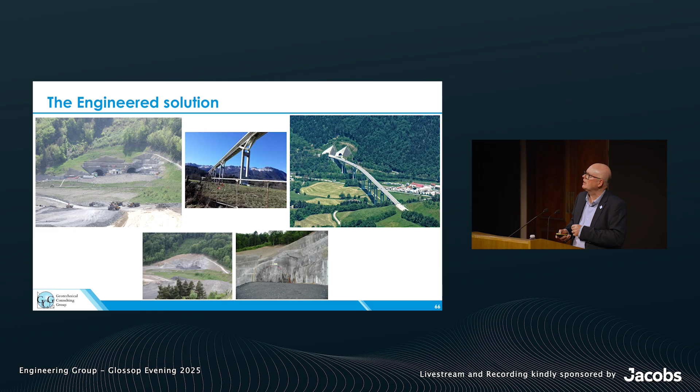They actually started to construct the major infrastructure, the tunnels, beautiful viaduct, but the roads connecting the tunnels, the roads connecting the viaduct were effectively left unbuilt. So it was going through a lot of contractual and risk transfer negotiations. In the end, it was a Scottish company that actually took the risk and then started to come up with the engineered solution, which was a whole series of extremely wide basal embankments, effectively building up and distributing very, very carefully the load across those sensitive deposits.

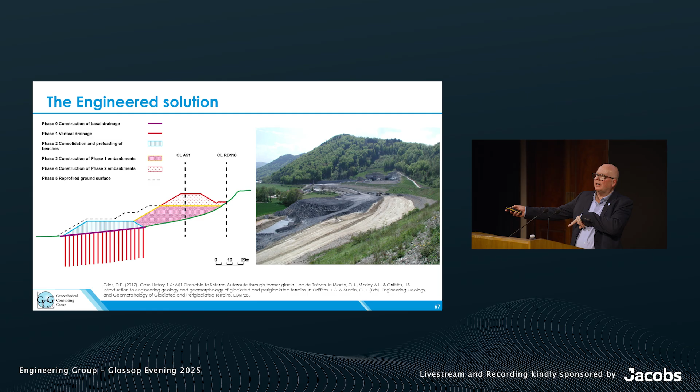There was even liming taking place as well, to experiment in controlling some of the water. So the road was then completed, a significant time after some of these initial bits of infrastructure. The tunnel was completely completed, and there was no road connecting the tunnel. You could walk through the tunnel onto the viaduct, but there was actually no road actually completing it.

So it's important, in perhaps the second desk study takeaway, that when we start to look at these paleogeographies, this is a legacy environment that we have across considerable parts of the UK. This is a great paper by Della and Julian Murton that looked at the lake reconstructions where you might find these sensitive and slide-prone horizons. So again, as another key desk study paper, this is very, very useful in delivering those changes of mindset in those conceptual ground models of where you might find those particular deposits.

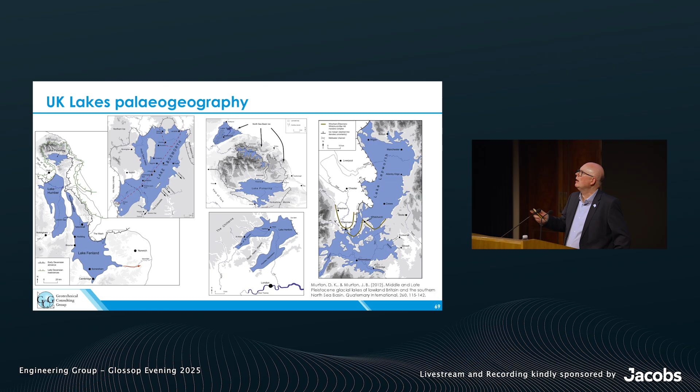So let's have a little look at what we might do then in terms of how do we actually go and undertake a ground investigation for those delicate and sensitive soils.

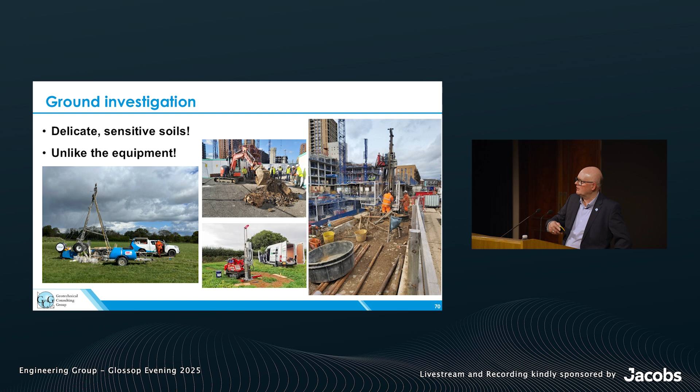So we perhaps need a different mindset in terms of traditional and conventional ground investigation, of what we can then start to utilize to actually profile that critical ground profile, highlight those problematic horizons that can help us understand the hazard and then subsequently de-risk them within that profile.

So we've got these subtle geohazards, these problematic horizons, these shear zones. We need to think about how we actually go onto site to record them. We found it very, very useful, being on site as literally as the material comes out of the ground, splitting the cores - we can start to see aspects of those shear surfaces, the relic shear surfaces. But then coming back again, when those cores have started to desiccate a bit, how are they separating - across what are effectively desiccation cracks, drilling-induced cracks, or are they separating across failure zones?

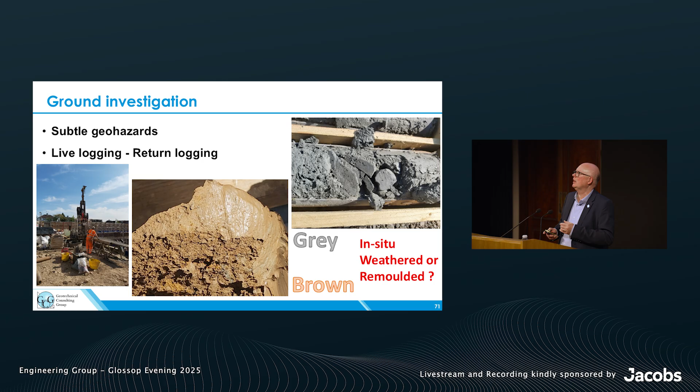If you're in a cohesive deposit that's experienced periglacial conditions and you're actively looking for shears, you might like to have two logging phases: effectively the live logging as it comes out of the ground, and then returning. Remember back to the London example, we want to differentiate between what is effectively a weathered horizon, what is in situ, and what is actually a remolded horizon. So we perhaps need to think about how we time our logging, how we go back and look for these subtle geohazards.

Now, I've started to see it - I had to actually ask when they first saw them, and it was perhaps really just ignorance. We started to see a lot of ZCL on logs, a zone of core loss. And it started to become apparent that when we were doing bish bash bosh in these sensitive soils, the bits that weren't coming back were screaming at us because they were the key pieces of information.

Sometimes I think that perhaps the zone of core loss is the most critical of the horizons because it's telling us that's a weak zone. It wasn't strong enough to be recovered by the particular ground investigation technique, and it's starting to show where we have these failure-prone horizons, whether on an embankment or a slope. So perhaps we need to pay a little bit more focus when we start to see that on a log, and again, the change in mindset. Rather than thinking, oh, it's not very competent drilling, it's poor quality drilling, perhaps it's telling us much more important value-added information than we thought we would get out of such an investigation.

Now, one regret I had at lecturing at Portsmouth was we never really delved into cone penetration testing. Since I've gone back and worked in industry, I've become much more appreciative that this is perhaps one of the key techniques we've overlooked in the UK in terms of these much softer and delicate soils. I know we're now improving on that offshore, but we can start to use the CPT to understand where we have those very, very weak horizons.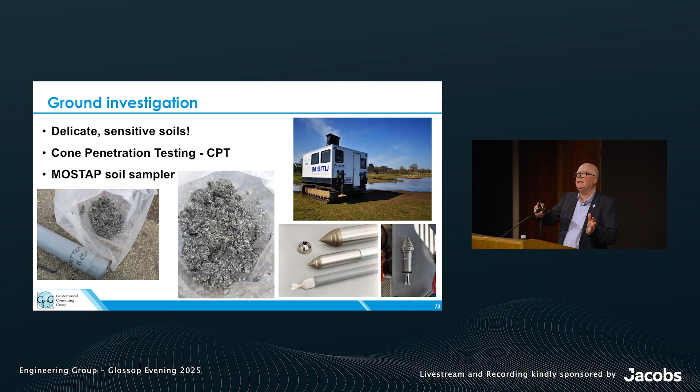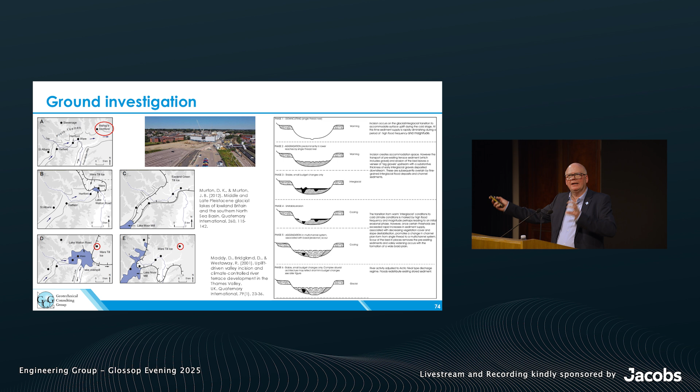This is an example from Bishop's Stortford, where some very fine-grained gravels had a carbonate precipitate within them. They actually had carbonate that had dropped out of the highly saturated chalk-derived water flowing through them, giving a very strange material that would have been completely lost if we'd used a much more conventional technique. This is probably one for the paper rather than one for the screen - this highly variable environment where we were doing it at Bishop's Stortford Station, where we had these ponds, these isolated ponds into river channels, into much more fluvial glacial material.

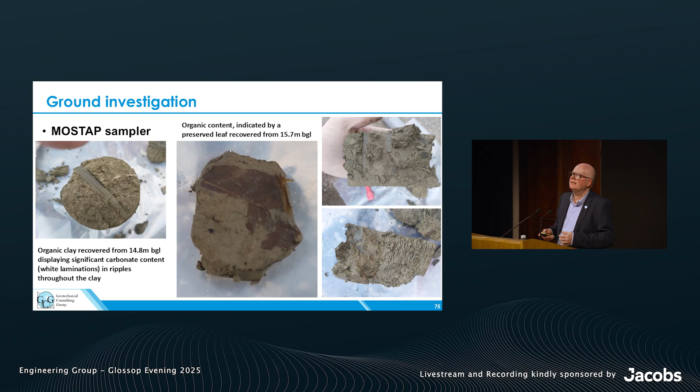To show you how the MOSTAP sampler was really recovering, we actually started to recover leaf mold from within those deposits, starting to understand that we had another problematic horizon - organic horizons that were actually within there. So when loading them with the piled structure, with the foundation structures, that became a critical piece of information that with a conventional technique, maybe some pushback saying, no, you might have missed it, but the subtlety of the MOSTAP sampler enabled us to fine-tune and understand some of the idiosyncrasies of that legacy environment left behind by a lot of those stagnant ponds, where there was actually finer grain sedimentation taking place.

And I think the CPT trace - this is what we should all start to really appreciate a lot more - has that subtlety within it. It's like reading the tea leaves at first; no one really tells you how to do it. It's only by looking at a lot of these, going back to your conceptual ground models - what's the expectation, what's the variability. On those CPT traces, there is a myriad of information that really helps understand the complexity of that environment, where you're getting a sudden loss of strength, a sudden increase in strength, the inclination changes showing you going through more granular material, and then you're hitting bedrock where you're seeing big spikes in the pore water pressures.

So I think in terms of changing the mindset, understanding that the CPT can offer a great deal of value added in these highly problematic horizons. So I'd like to finish off with another quaternary impact that, as I mentioned at the beginning, I think we're only starting now to refocus on, and that's the whole concept of neotectonics.

Adrian Collins from Arups was the champion through the 80s and 90s of trying to get us to think about neotectonics. It's something that's gone out of vogue, effectively looking at the more recent movements of horizontal and vertical crustal movements, looking at faulting, and whether that faulting is active. Is it benign, or can those faults actually still move? That's been brought into focus with the new nuclear power stations, Hinkley Point and down in Sizewell, starting to understand that bedrock faulting system, is it prone to movement?

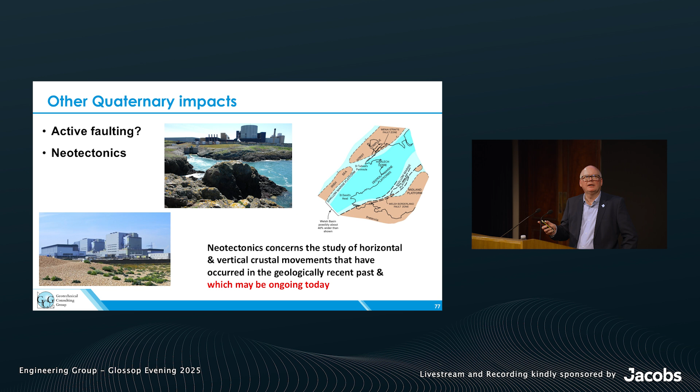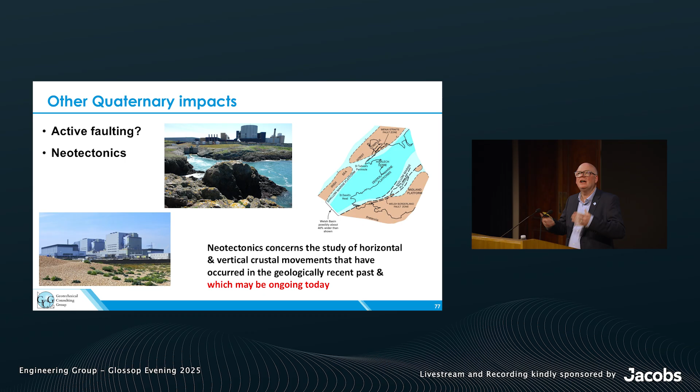A lot of the focus there has been on dating the paleo movement by looking at the fault gouge rather than putting it in a quaternary context. There's loads of evidence about quaternary sea level rise with raised beaches, etc. What we need to know is how often are these faults moving? Are they still moving? We can start to see that there are other data sets now that can help inform whether we've got much more active movements taking place, which you can imagine in terms of the risk for the nuclear power station is quite important. It's sat on top of a fault that starts shifting around - that's going to have significance in terms of that structure.

We can go back to Mike de Freitas' Glossop lecture, where he presented the whole aspect of faulting in London. We've got some very interesting aspects of the river system in London, which does some strange 90-degree bends. When we look at those bends, we can start to think that's the river hitting a fault that's being diverted. Reconstructing that, we find very interesting correlations with the underlying basement faulting system, the Variscan imprint that has effectively been brass rubbed into the overlying sediments.

So London is much more heavily faulted than perhaps we thought a decade ago. There's Tom Morgan's PhD paper, starting to present some of the complexity of these fault zones, something that perhaps in our geological conceptual models we've only really started to appreciate since Crossrail more recently. This was a project I was involved in, at Wembley, where we had 6 or 7 boreholes, no joining the dots whatsoever in those boreholes. We were going through highly indicative strata in the Lambeth group and the chalk and the London clay, strata we had a really good handle on, and trying to reconstruct that as a geological model was extremely difficult.

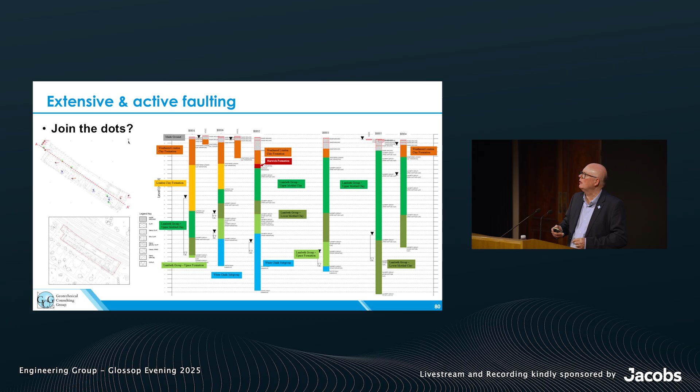So we've got faults all over London. So what, you say, there's faults all over London - that's great, we've developed our ground model a bit further. But what if they were active? What if we've still got quaternary-related movements actually taking place within those faults? What evidence might we then go and look for? We had a project just across the road in St James's.

The photograph in the bottom left-hand slide shows you the Thames Terrace gravels faulted with the London clay underneath - that's 100,000-year-old gravel, the Kempton Park gravels. On the right-hand side, this is in Ilford, from the BGS London memoir. Out in the east of London, we've got gravels, again with a reverse fault cutting through them. So these are quaternary deposits that have got faulting within them. All of a sudden we've gone from geological time to sub-geological time, where we're actually getting active movements, active displacements taking place. So these are not benign faults - they have moved in effectively a time window now that has the potential to affect the engineering project.

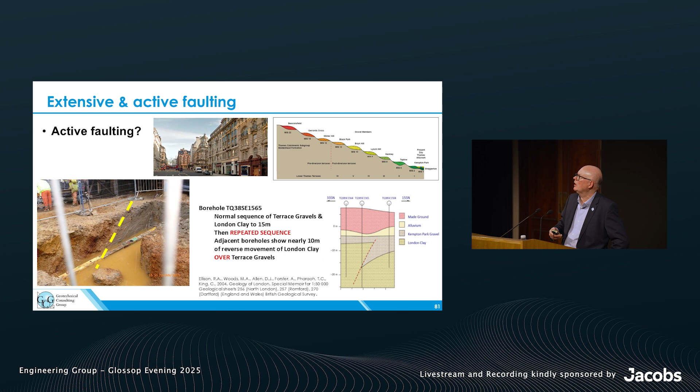Now other links to this become quite important, when we start to look at some of the new data sets that are becoming available. We got very excited about the InSAR data, and guys at Imperial have worked and produced interesting maps where effectively they're looking at a line of sight measurement. This is a radar-based data set where you can look at a line of sight and get a vertical and a lateral displacement. They started to see that over the time frame of these data sets, you started to see blocks that were moving up, blocks that were moving down, blocks that were translating against each other.

And when you started to put some lines on those maps, you started to see this strike-slip pattern, this Variscan imprint. So these are real measurements now of displacements of bits of London that are bobbing up and down, bits of London that are sinking.

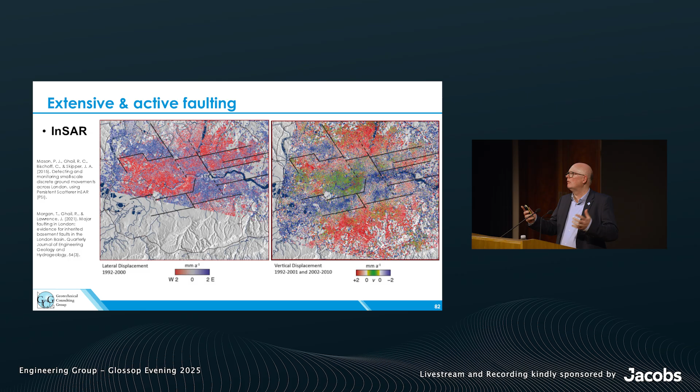So we're now looking at historical time, really the last - I can't quite see when the earliest data was, I think it goes back to about the 1990s. When you start to combine these data sets with these highly accurate radar images, you start to get a very different feel about how things are particularly moving.

And that became - I got sadly excited about this. So we've been working very closely with SatSense, who are one of the key providers of this data, and they were looking at a couple of basement projects in Mayfair.

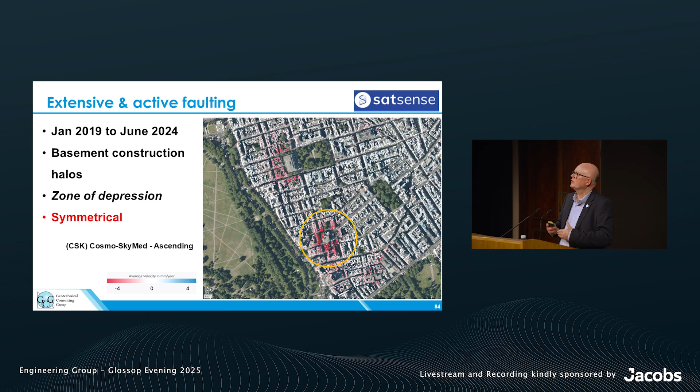They were using two different INSAR data sets, and one of the basements came up with what you might expect. You construct a large basement, you get a zone of depression, and you get this nice symmetrical zone of depression within usually the London clay formation strata as the basement is constructed. You've got a nice symmetry to that.

But what then got me excited was in the same geological conditions, the same stratigraphy, one of these basement constructions gave rise to quite a significant asymmetry in terms of how that cone of depression was then starting to develop.

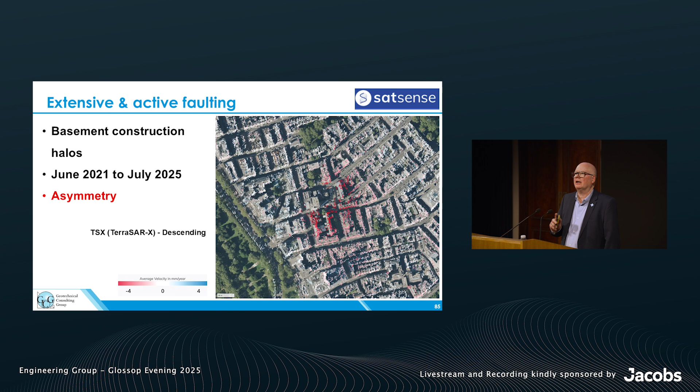We started to see that there was effectively a lineation that was starting to be picked up, and this data has a 6 to 12 day repeat cycle. So it's a high volume of data that's live, real time to the construction then taking place. We can start to see we're getting a very different displacement pattern.

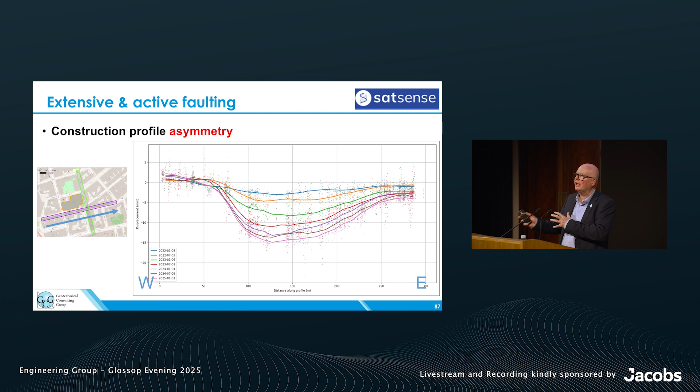And I started to get a bit excited and speculate that perhaps what we were doing here, we were picking up one of these faults, and because of the depth - these basements are really quite deep - we were starting to propagate movement on one of these faults that was orientated.

So it was not the ground response from the engineering construction, but behind it, backed up by some of the bigger structural pictures that INSAR provided, we have a very interesting dilemma. Is this really our engineering starting to shift the faults around? And this is the ground relaxing and accommodating that movement, which was then picked up by the INSAR.

It was not what was expected in terms of the symmetry from the cross-sectional profile. So back to Mike De Freitas's London faulting map - do we need to start to think about these faults that we're starting to map in a different light in terms of that quaternary legacy? Have we got perhaps a larger geotechnical and even geological hazard problem than we thought about in the past?

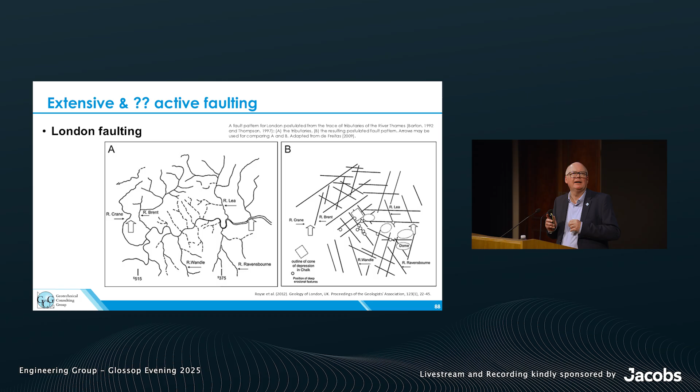So again, mindset - we've got this movement. And I put this up because we've gone through our undergraduate programs reading a textbook called The Dynamic Earth, and we think perhaps the dynamic Earth is not sort of contemporary. And this was something that Jackie Skipper mentioned.

She had an archaeologist friend - I remember now it's Jay Carver - and they were working on Crossrail, doing some of the archaeological digs, and they had a Bronze Age track that came out of what was the original city of London. And that had effectively a displacement, a lateral displacement across it.

So now we're going into the Bronze Age, where we've actually got some archaeology that has been sheared effectively, potentially in one of these active fault zones. So we're starting to see very, very recent data sets that might say, is it more historically active? What was shearing that Bronze Age track?

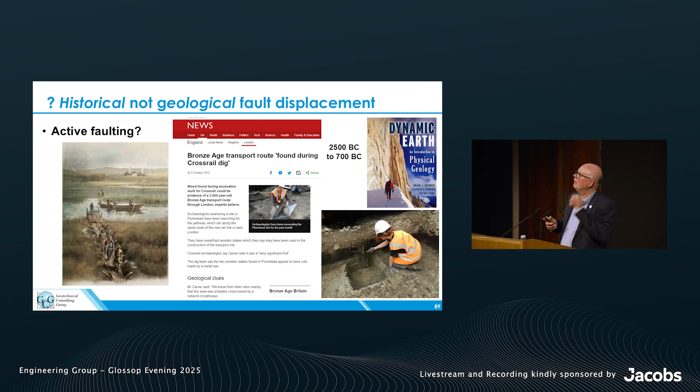It's not something that we would effectively leap to. So again, it's the different mindset - have we got a larger hazard there than perhaps we've actually perceived in the past?

So final comments really are sort of the takeaways - that ground is complex. We know that when we start to look at ground investigations, when we start to look at conceptual models, but the quaternary really is more complex because of the legacy of those recent climatic changes. We've got significant variability in those ground conditions we need to really appreciate.

We don't yet have in this country a high-resolution quaternary map base. I keep teasing Holger Kessler that the Selby sheet is perhaps our best quaternary map from the BGS. The BGS have come to the party perhaps with good influences lately in terms of actually realising that mapping the quaternary is an important part of that map base.

We are not taking students out into the field to look at those particular materials. We're losing that field-based education, we're losing that field-based training. The QRA and the engineering group are now starting to actually put that into practice and start to take early career staff out into the field to help understand that variability, help characterize, describe, but also help understand the impact of that variability.

So just finishing off, I'd like to thank Jim and Nick for proposing and seconding. Thank you, engineering group, for what has been a tremendous honour at my time of life and to my career. It really has been fully appreciated.